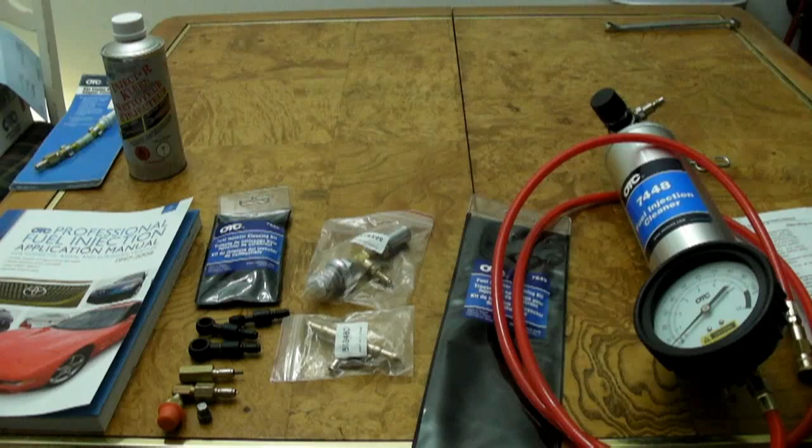Hey guys, today we're looking at a fuel injection cleaning kit. This is OTC brand fuel injection cleaner. This is for cleaning your fuel injectors on the car.

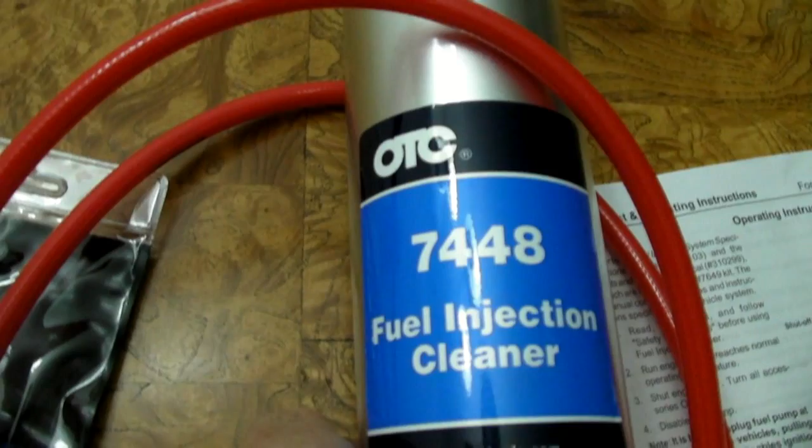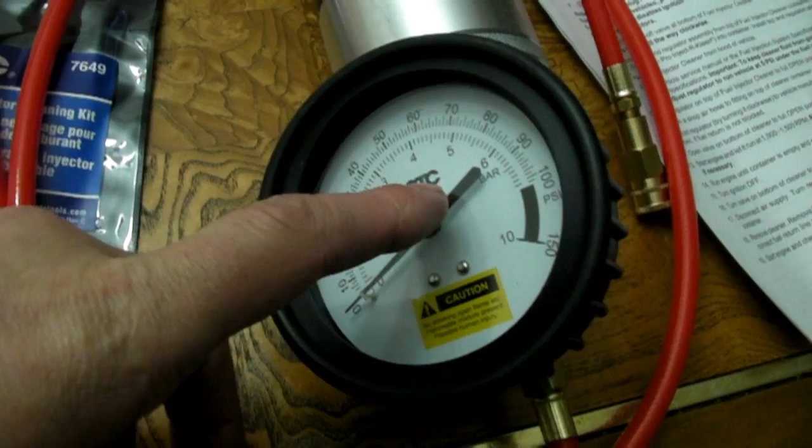So this is the part number 7448. And what you get in the kit is the fuel injection cleaning canister. It has a large dial on here to dial up your fuel injection pressure.

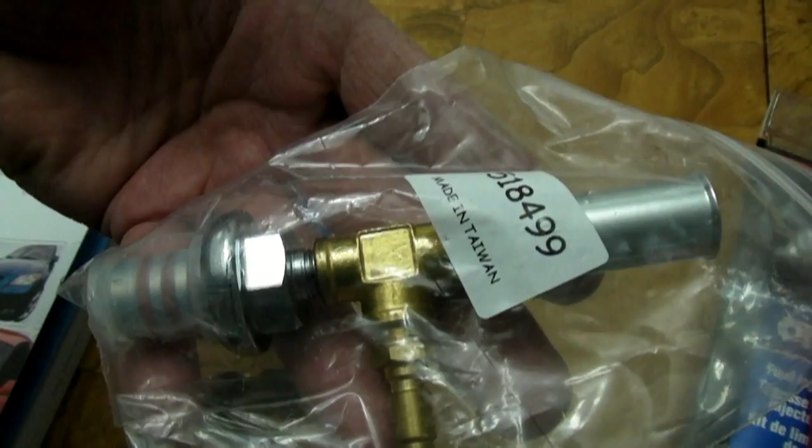You get several adapters. This is an adapter for using on the fuel rail. So you would disconnect your fuel lines from the fuel rail and connect this in. And it comes with several different types of adapters. You got several different sizes for tapping in this fuel rail here.

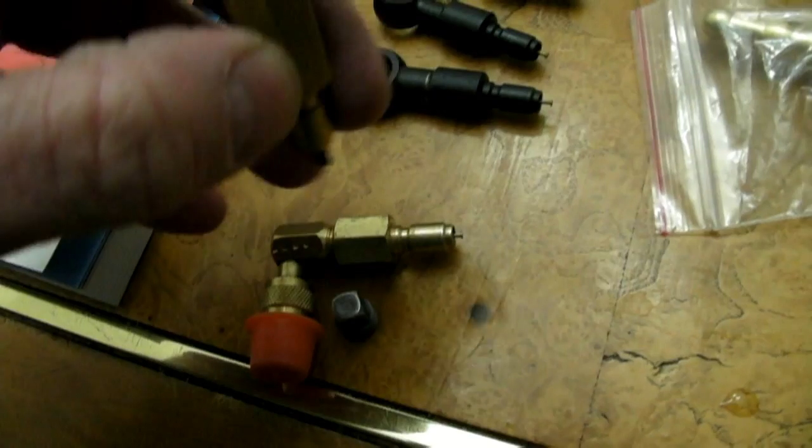This is for connection with the Schrader type valve. A lot of cars have that. Sort of looks like a tire valve. Here's another type of Schrader valve connector. Comes with a little block off screw.

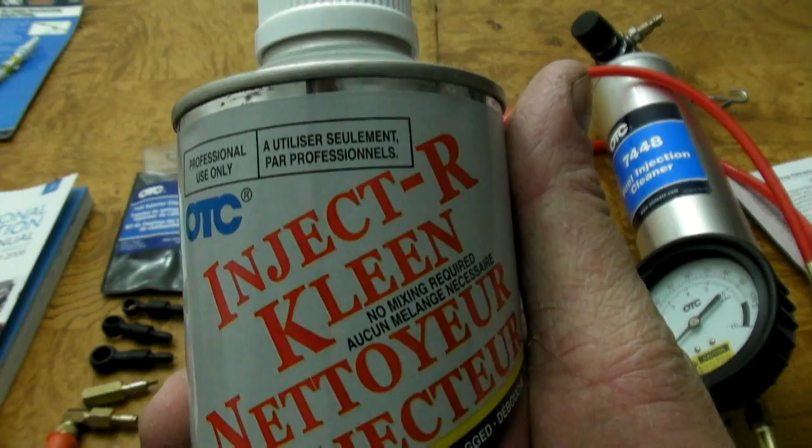Okay, some other things you're going to need to purchase when you're buying this fuel injection cleaning kit is the Inject-R Kleen. This is what you're going to use to clean your injectors. Your engine will run off of this when you connect it up to the system.

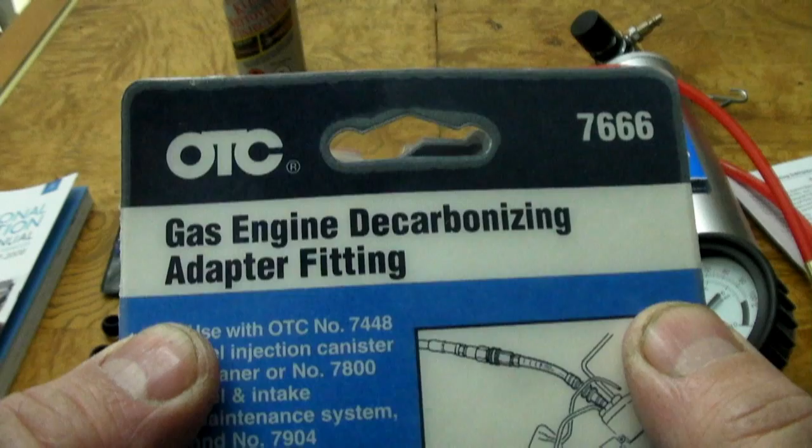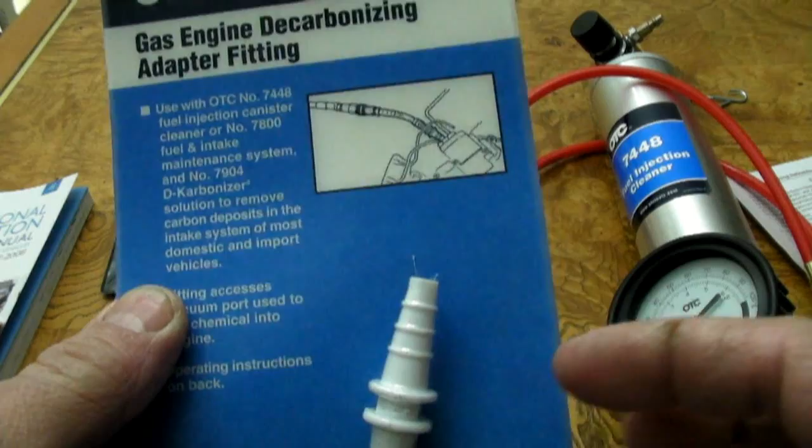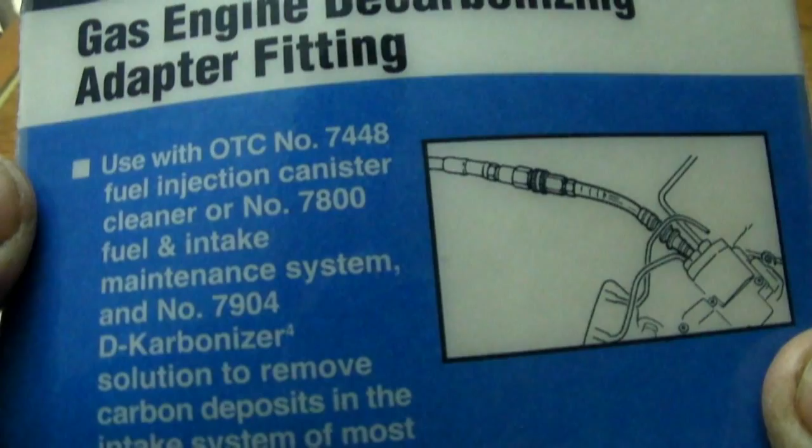And there's also a decarbonizing adapter you can buy for this. So with this adapter, it connects to your intake manifold. So you would disconnect a vacuum line or like your power brake booster line, and you would use a different chemical. You would use the number 7904 D-Karbonizer solution with this, and this would decarbonize your intake.

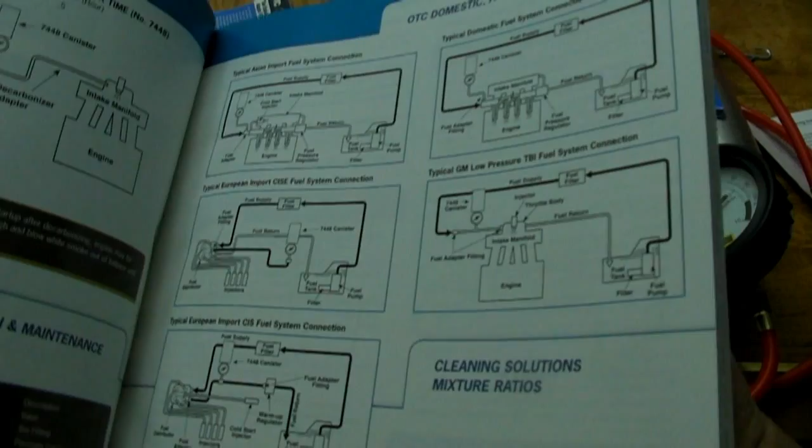Okay, another thing you get with the injection cleaning kit is the manual. And this covers all domestic, Asian, European vehicles from 97 to 2008. OTC may have updated information for 2009 on up vehicles at their website. So in here shows you how to connect and operate the fuel injection cleaning kit. And then you have information on all your vehicles.

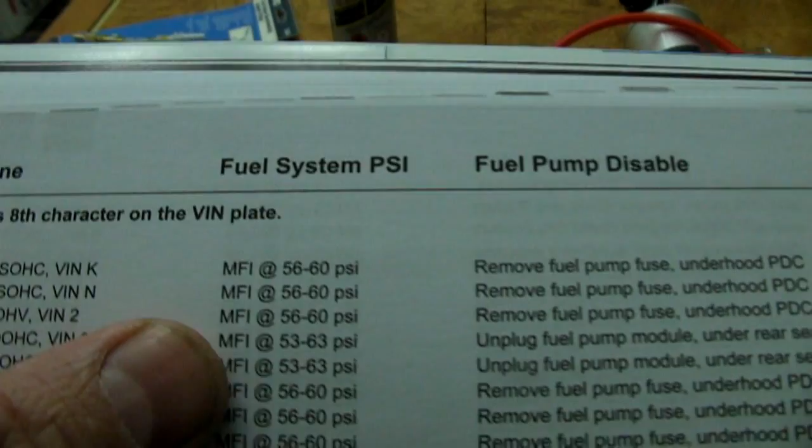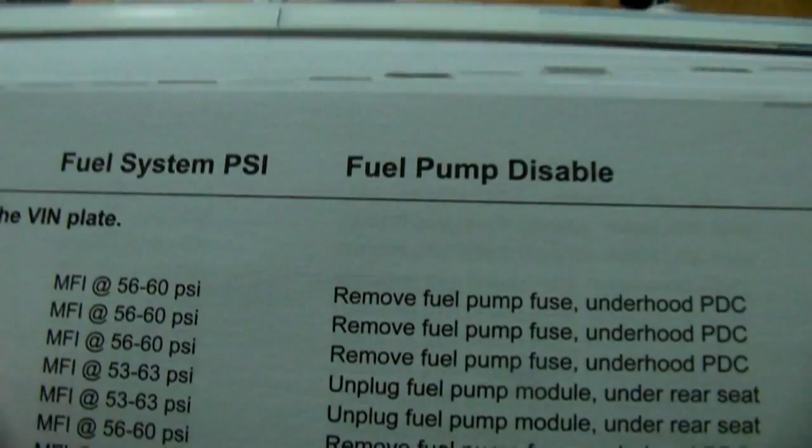Say we're going to do a 2008 Jeep Commander, the 3.7. Here's the operating pressure. So you want to dial it down on the regulator here to a lower pressure than that. So we would go down to like 50 psi, so the fuel injection cleaner doesn't go out the regulator and into the return line and back into the fuel tank.

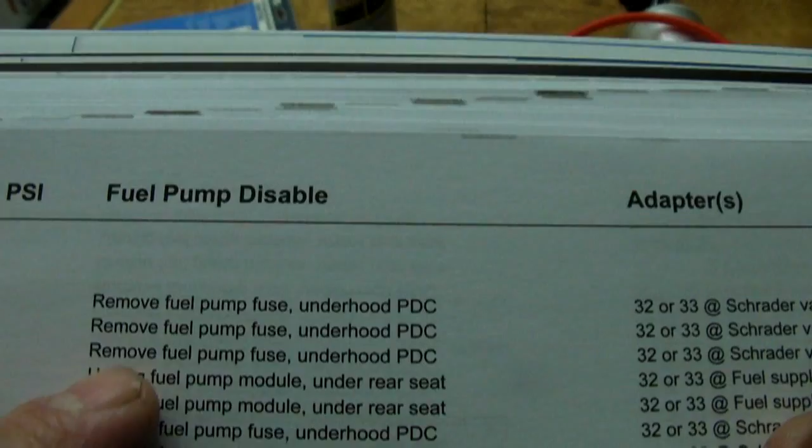And then here tells you where to disable the fuel pump. A lot of times you just pull a fuse or a relay. And then which adapter to use. There's a listing for that.

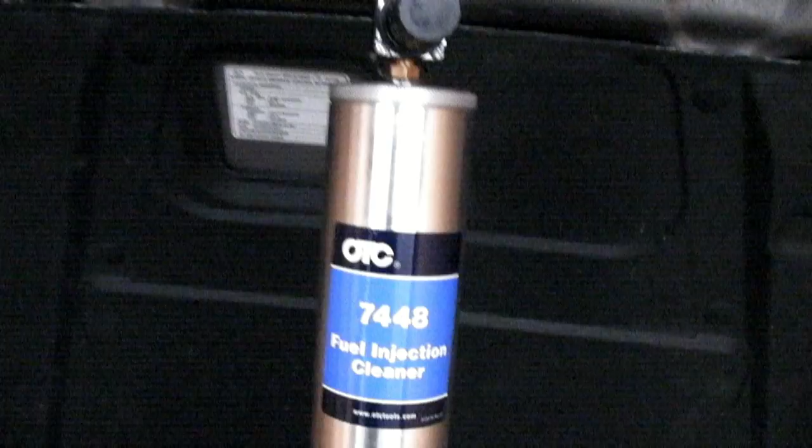Okay, getting ready to clean the injectors on this 2009 Subaru today using the OTC fuel injection canister. So I'll add some fuel injection cleaner to this canister, and the engine will run off of the cleaner, and that's going to clean the injectors. But before I get started, I'm going to have a little setup to do.

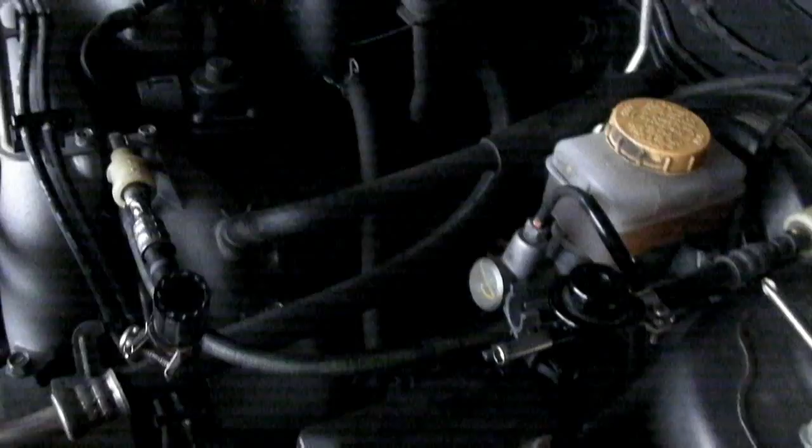So the first thing I'm going to do is I'm going to disconnect this fuel line right here. This is on the driver's side, right near the strut mount. It's the bigger of the two lines. This is the pressure side line.

Okay, so next I'm going to install this T-fitting in the line, and to install that I'm going to need an extra piece of fuel line and two more clamps. Make sure you get the fuel injection style clamps. These clamp all the way around. They have a band that goes the complete circumference of the fuel line, so they get equal clamping pressure.

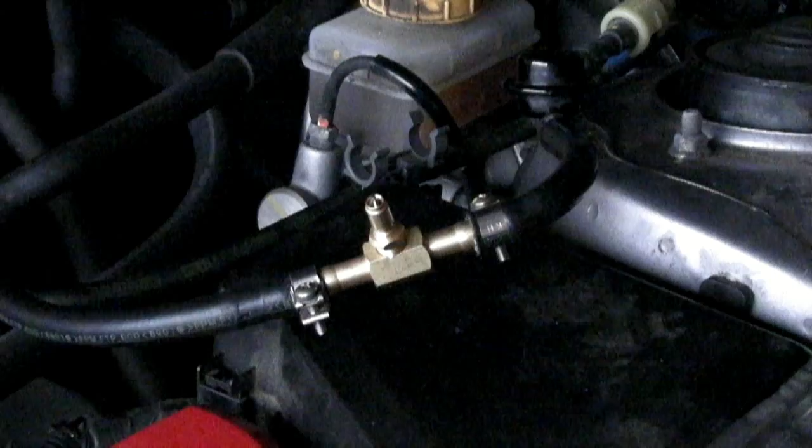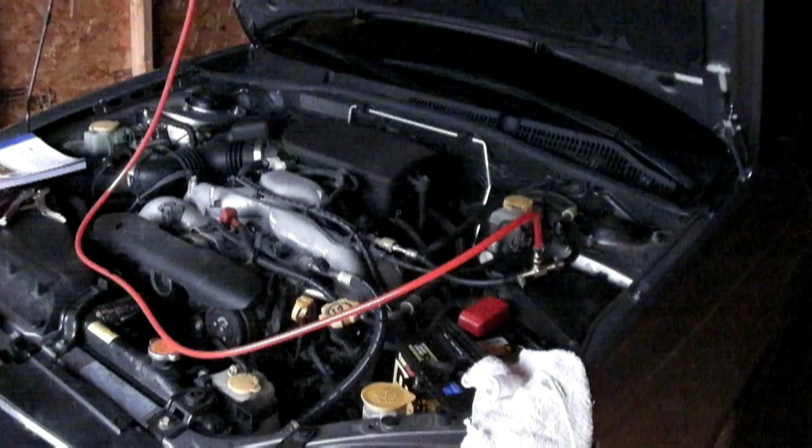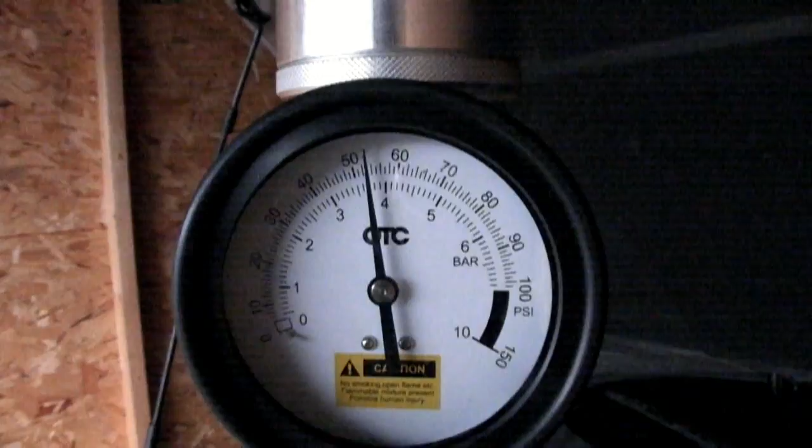Now I'm going to start the car to make sure there's no leaks where I spliced into the fuel line. Okay, with the engine running, I've got the fuel injection cleaner hose connected. I'm going to just do a check on the fuel pressure. And one thing I'm going to do is I'm going to shut the vehicle off and make sure this gauge maintains its pressure to see if we have leaking injectors.

And the pressure went down slightly. But what I'll do is I'll keep an eye on that. I'm going to let it sit for about an hour and come back and see if the pressure's dropped off. Okay, next what we got to do is pull the fuse for the fuel pump, which is located under the hood right here.

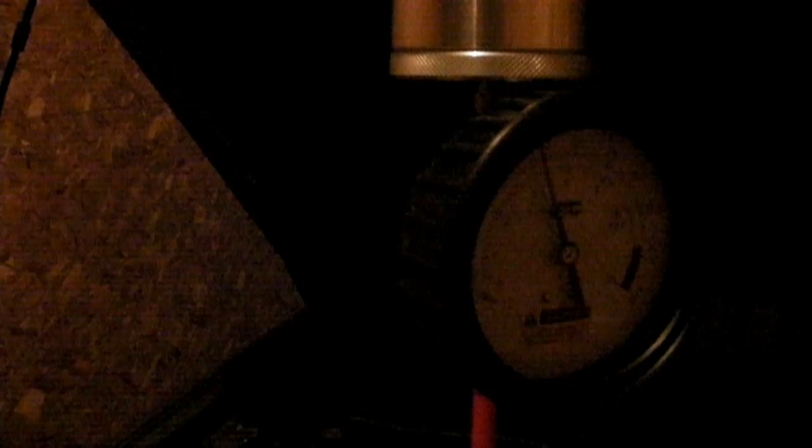Okay, there's a shutoff valve right at the bottom of the canister. What I'm going to do is turn that clockwise and shut that valve completely off. Okay, next we're going to want to fill up the canister with our cleaning solvent.

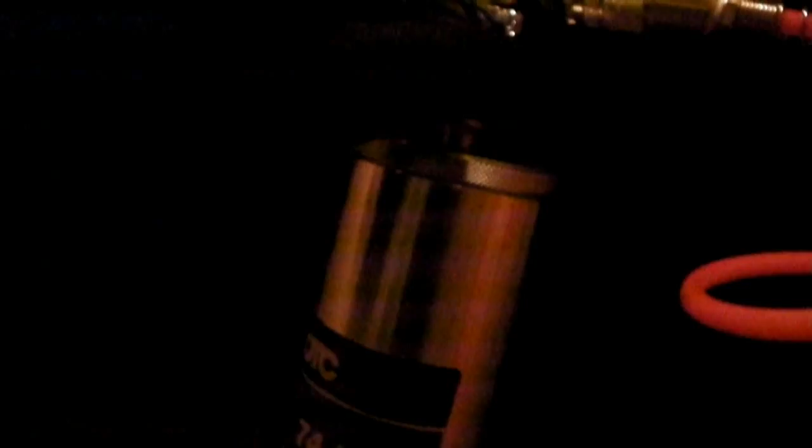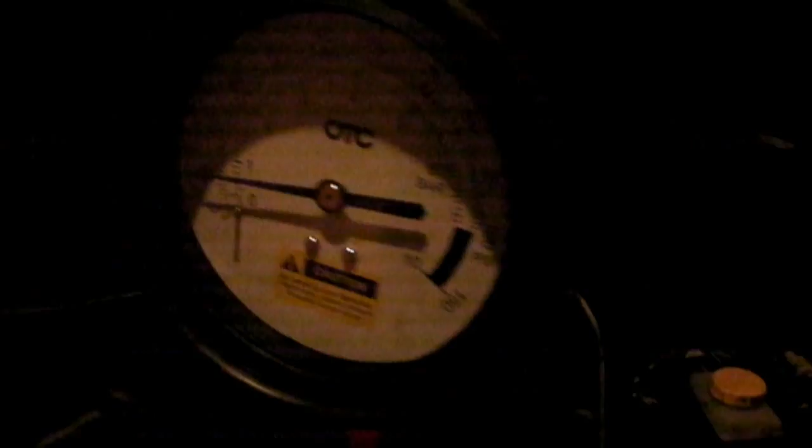Okay, next what you're going to want to do is make sure your regulator is backed off so there's no pressure on the gauge. Connect your shop air. You don't need a real large compressor, but you'll need one with a reservoir tank. And what you want to do is bring up the pressure on the regulator till it's about 10 pounds less than what you tested at earlier. So it was at about 50 when the engine was running earlier. So I'm going to dial this up to about 40.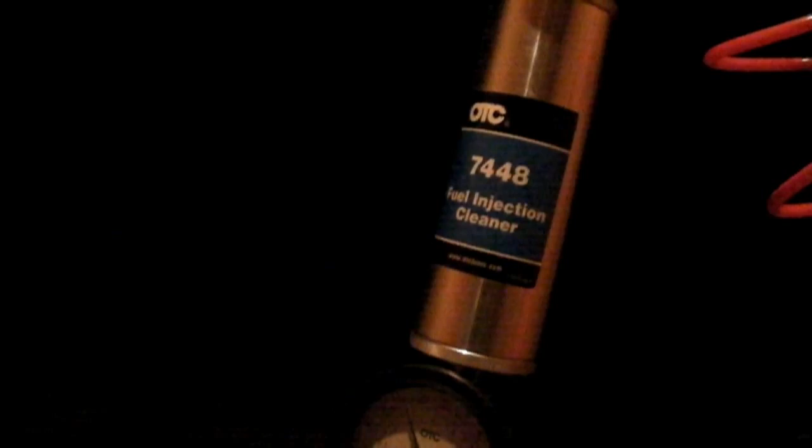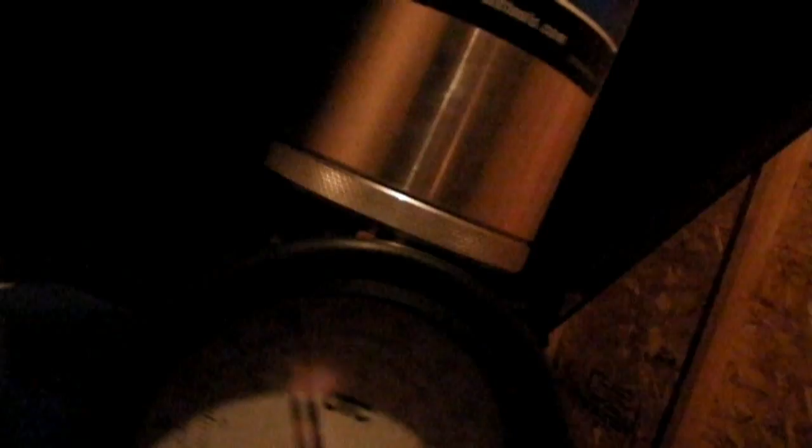Okay, the reason why you want your pressure less than the normal operating pressure is because you don't want your fuel injection cleaner to be returned to the fuel tank. What you want to do is open the valve at the bottom here. That's going to allow the flow of fuel injection cleaner into the fuel rail. You want to start your vehicle, let it run until it runs out of fuel injection cleaner, and your injectors will be clean. We're going to start this up.

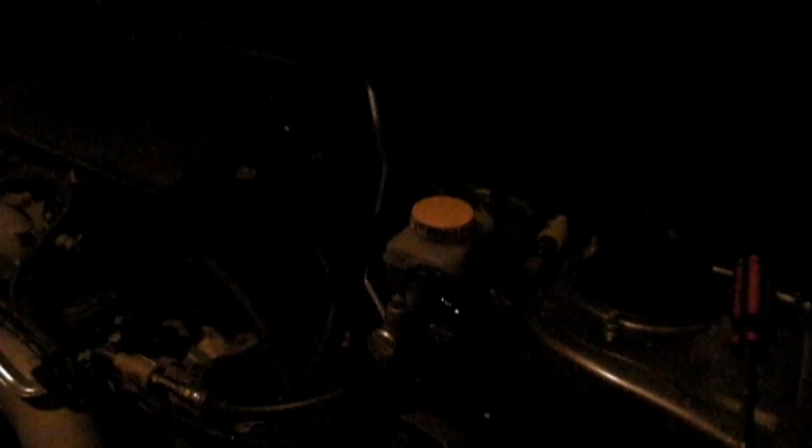Okay, just to finish up, you want to reconnect your lines. Put your fuel pump fuse back in. It's right there. And then you're going to want to start the vehicle and make sure that there's no fuel leaks at these lines that you took apart. And take the car for a test drive.